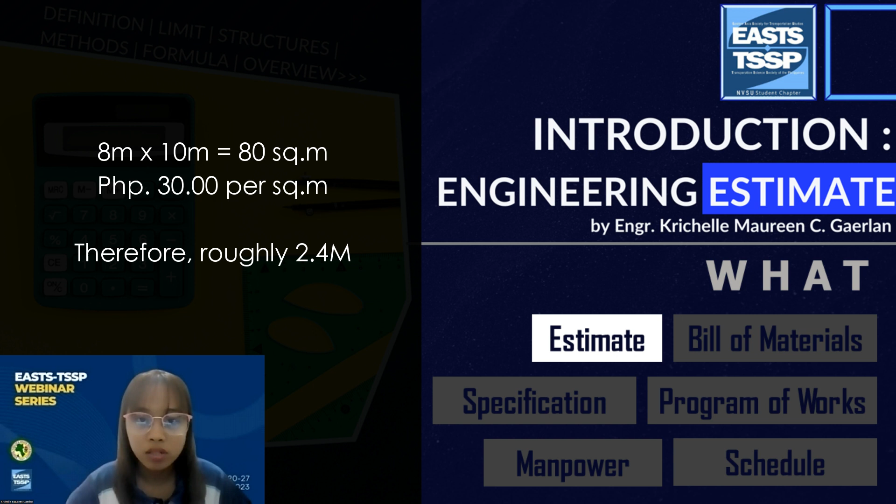But for some cases, if we try detailed estimate, the cost might experience decrease, but it takes time to compute because you go into details as per proposed plans of the building. However, detailed estimate gives us more accurate, near-reality projected costing.

In rough estimate, we just give the rough idea of cost of structure from previous experience and knowledge and neighborhood structures. On the other hand, in detailed estimate, we give the details, specifications, and quantity of each and every material.

Speaking of cost, I hope you won't interchange it with the definition of price. The key difference between cost and price is the amount of expenditure you incurred on materials, labor, and other related activities. In contrast, price refers to the amount that the supplier charges for providing you the goods and services. However, price and cost both have the same meaning, the amount of money you pay for something, or that something that costs. But the main difference again is the perspective.

Price is generally used to refer to the amount of money that a supplier or seller is asking for something. And cost generally refers to the amount of money that you will spend, rather than the price of the product or material needed.

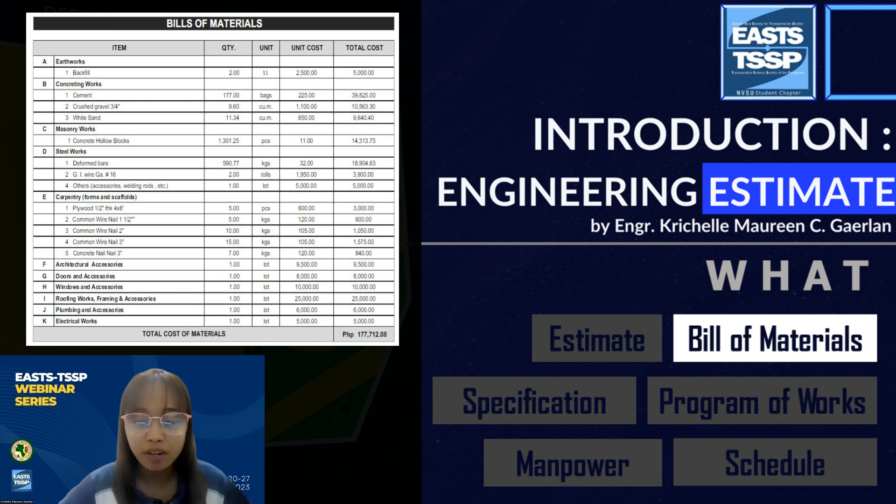Bill of materials, or BOM, is a structured list identifying all materials, components, and subcomponents required to construct an activity, as well as procuring and using the material.

Specification, or what we call the spec, as per Autodesk definition, means the detail of work and workmanship required for each construction project. It is usually a written document describing the scope of work, any materials that are to be used, methods of installation, and the quality of workmanship under contract.

Program of works, sometimes equivalent to the bill of quantities, represents the project information, the basic information like the title, location, the projected budget, allotted budget, the duration, how many calendar days, including the list of summarized quantity of activities, as per material and manpower.

Manpower, speaking, is the working force that is committed to building constructions, such as planning, erecting, and modeling the building. Say, the engineer in charge, the foreman, laborers, plumbers, electrician, mason, carpenter. These are the key role players in manpower.

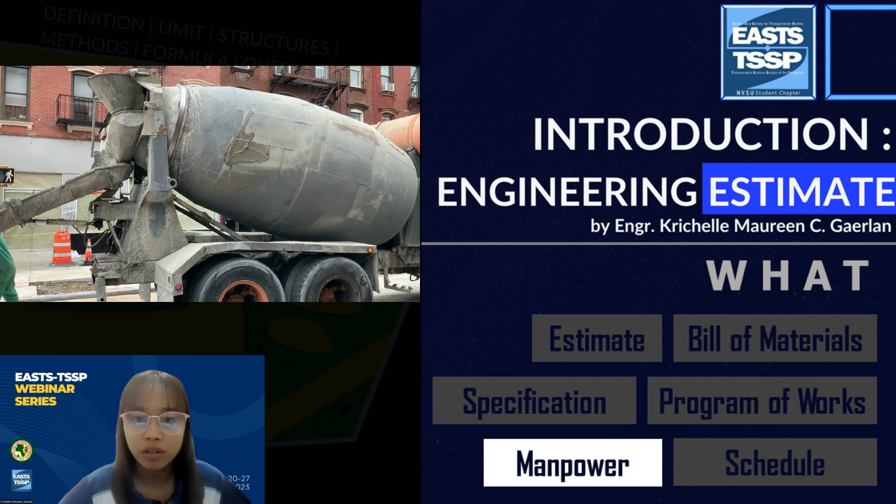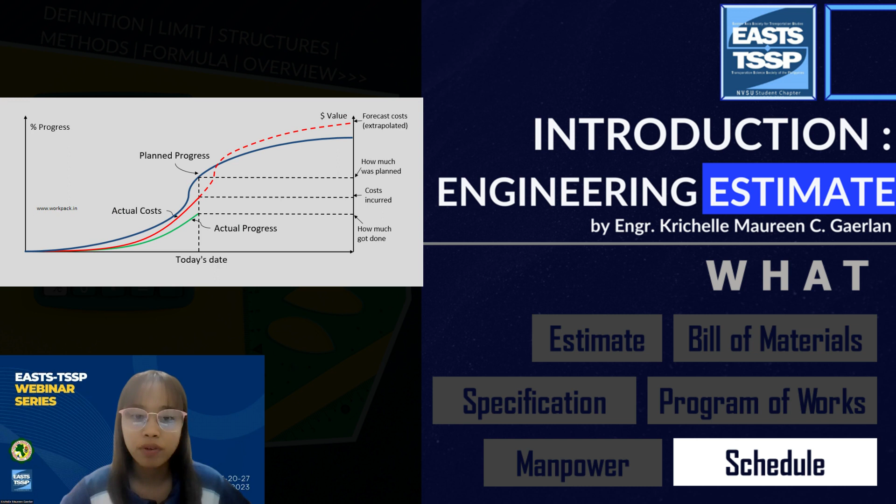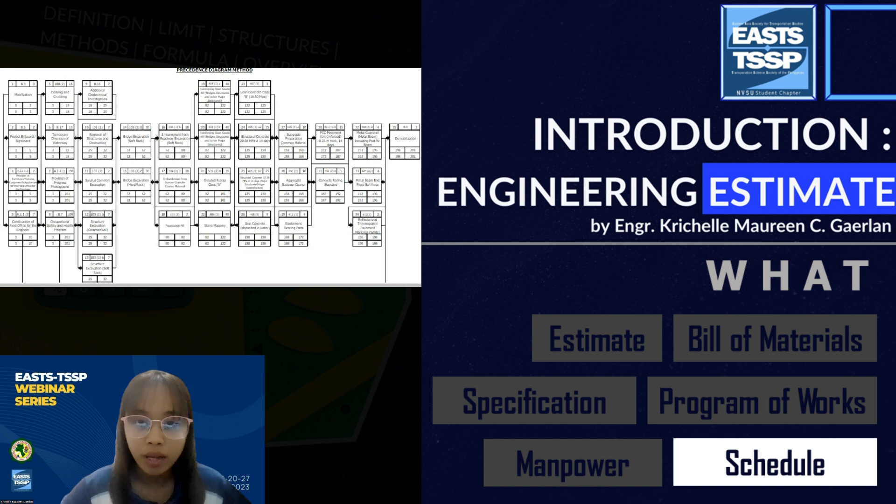Schedule is a timeline for every task and event in a construction project. It is a tool used by contractors to track the progress of a project. For some instances, we also include the bar chart, S-curve, and even the CPM or critical path method to look out for priority projects. However, in modern techniques nowadays, we use the PDM or precedence diagram method, which is more informative and easy to evaluate.

In the estimating profession, we also have three categories who does the job. As you apply for work, especially abroad, you might encounter job titles like cost engineer and quantity surveyor. Cost engineer originated from the United States, and the term quantity surveyor came from the UK. Civil engineers tend to have the ability to estimate, thus making them play the role of being a cost engineer and sometimes value engineer.

But when it comes to the title quantity surveyor, to become certified for the title, or if you want to work abroad for it, it takes years of experience. The least experience would be like 3 years, and you have to earn a bachelor's degree in quantity surveying and pass rounds of examinations plus an interview to get certified.

Certified quantity surveyors refer to a person who is a holder of a certificate of registration and a valid professional license issued by the Board of Quantity Surveying and the Professional Regulation Commission, who is legally qualified to practice quantity surveying in the Philippines. Anyway, it is your option.

If you want to enroll for schooling, it's like a masteral degree, 2 years as far as I know. It is offered at MAPUA, PIBE or the Philippine Institute of Built Environment, PICQS or the Philippine Institute of Certified Quantity Surveyors, and sometimes at PCA or the Philippine Constructors Association. It's like an equivalent group of professionals for civil engineers, but more focused on quantity surveying or the broader estimate field.

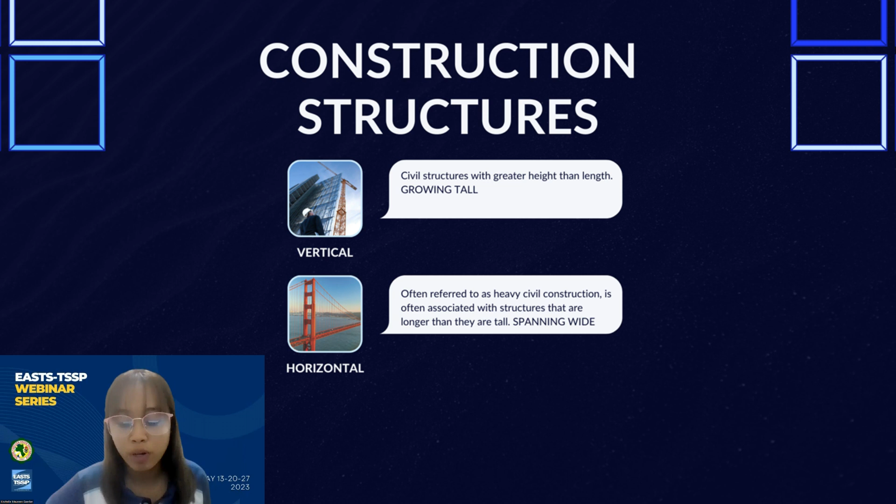So we have the vertical structure and the horizontal. To establish which category your project falls to with its spatial reference, or the space: horizontal construction is typically wider and lower to the ground, while vertical construction is higher.

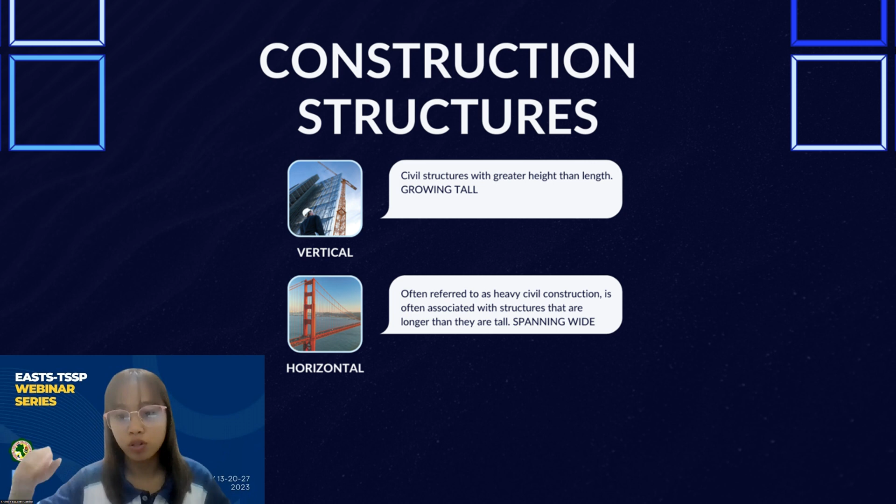Vertical structures are structures that are growing tall. A skyscraper is an example of vertical structure, and so is a high-rise building. Typically, a high-rise building is considered to be more than 7 to 10 stories, or 23 to 30 meters.

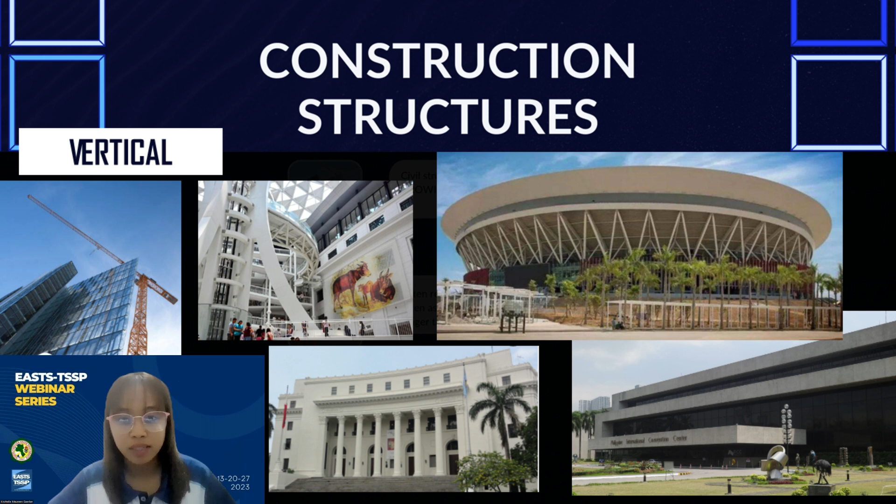Vertical construction primarily consists of projects that are built vertically and rely heavily on design by an architect, but we also do that as civil engineers, though there are limits. Examples of vertical construction projects include buildings like skyscrapers, offices, apartment buildings, museums, parking areas, subsurface or structured facilities, and building foundations and site works.

Horizontal construction involves structures that are longer and wider than they are tall. Some examples of heavy civil construction projects include, but are not limited to, infrastructure and transit such as roads, railways, and bridges. We also have power and communications like transmission facilities, electric lines, fiber optics, and subterranean pipelines, sewer, and water lines.

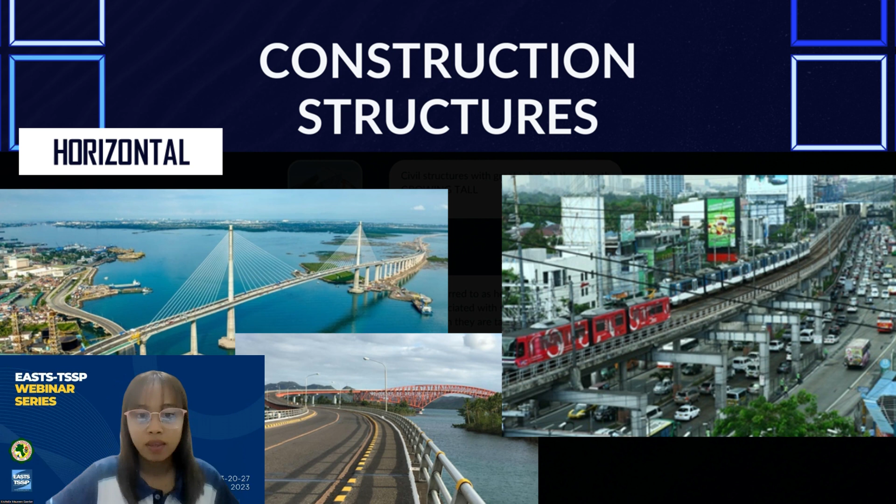Moving on, there are several applications that you can use on your estimate, especially when you are on a certain foreign company. Some require using Cost X or Plan Swift, contractor foreman software, on-screen takeoff software. But what's more prevalent is using Primavera, MS Project, or your customized spreadsheet template using Microsoft Office Excel.

What makes MS Excel convenient to use is that you can create your own template. You can use it on your private projects, and you can update factors, automate the links and formulas, add infinite worksheets, and insert your own charts and diagram schedules. It is more handy, and there is total freedom because you are the creator of your own template.

Unlike Primavera, MS Project, and other applications, there are limits and it urges you to encode manually the data so that you can compute the project cost, manpower, equipment, and projected calendar days.

Now for the formula, we have the basic computations such as area and volume. Usually the unit for area is square meters and volume is cubic meters. We apply area computation usually on ceiling works, carpentry, cabinets, drywall partitions, glass works, formworks, roofing, painting, and masonry works, especially tile.

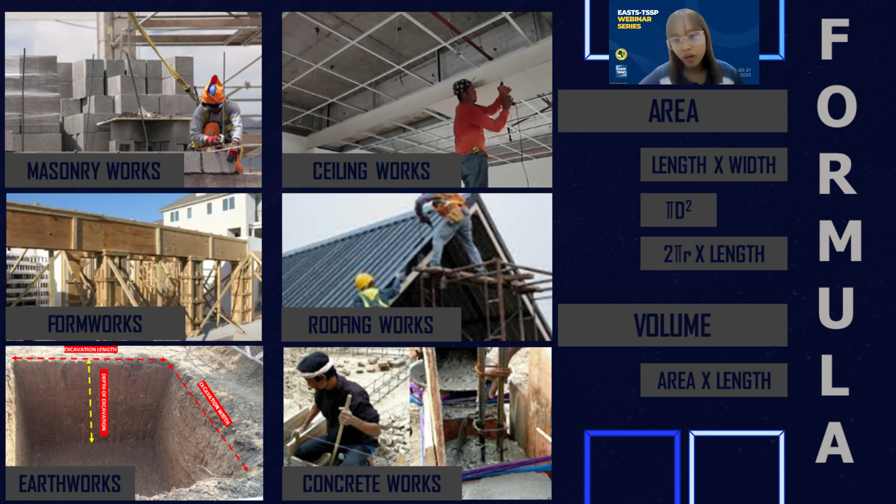For plumbing works, we get the sum of all linear length of needed pipes, either sanitary or water line. And we manually analyze and count the required fittings like T, elbow, coupling, or Y, and the plumbing fixtures like the water closet, bidet, urinal, sink, lavatory, and shower.

As for the components, one must know the parts of what kind of structure you are estimating. A component is a constituent part of a building. Say, for example, the basic components of a building structure are the foundation, floors, walls, beams, columns, roof, and stair.

These elements serve the purpose of supporting, enclosing, and protecting the building structures, and these are essentially needed to reflect on your estimate. Why you should be familiar with the components is that this is to avoid redundancy or missing quantity in your computation.

If you are not familiar with what you are estimating, you can expect errors, maybe an inadequate number of pieces of rebar or bags of Portland cement. These small errors might give you unwanted risk and affect productivity during actual implementation. Instead of gaining, you might be sacrificing time and money. So you need to explore the parts of the structure and know how to organize them.

Shown here are the basic components of a building. The parts below usually consist of the foundation, grade beam or tie beam, then ground floor slab. Succeeding floors above, we visibly see the columns ascending, the reinforced concrete beams, suspended slab, masonry works, especially the concrete hollow blocks, walls, and tiles for cladding stones. We also have the roofing at the top, the doors and windows, accessories, plumbing, electrical, and then fully furnished with painting.

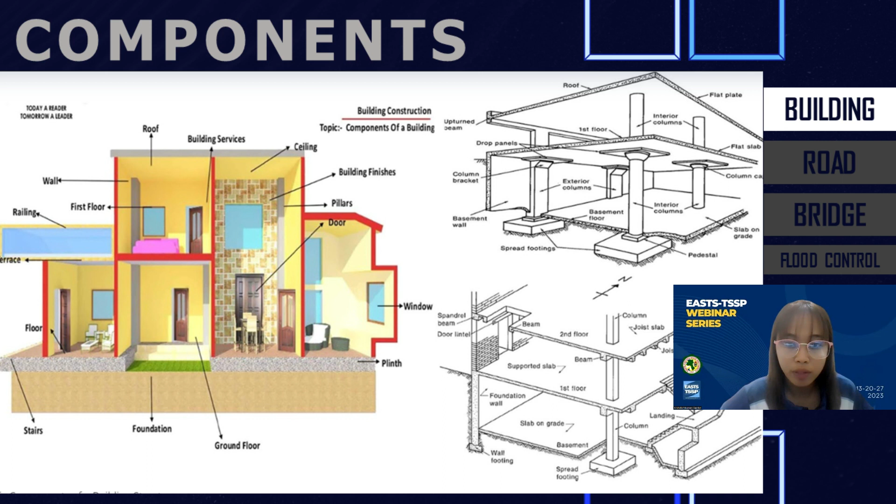Note here, in construction of buildings, we first include earthworks, especially structure excavation, and also establishment of bunkhouse, project board or billboard, or information board consisting of building permit, meaning you are allowed to operate. And as much as possible, we put a protective or temporary fence for safety purposes.

For the roads, we have the basic subgrade, subbase, the base, and the topping. The topping could be made of asphalt or concrete. Road designs vary as per the road engineer's design, as per plan, and their basis is more on the DPWH Blue Book.

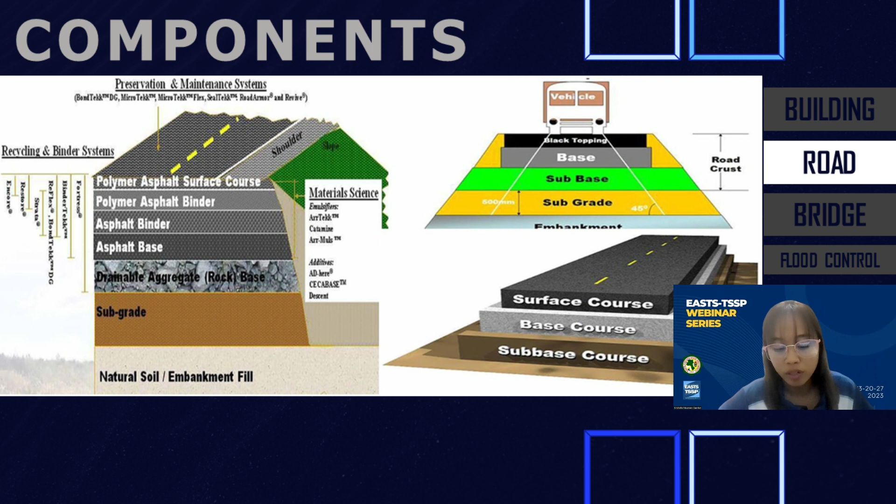Bridge construction comes in different kinds of structure, but basically we have the abutment, foundation, girders, pier, parapet, and slab deck. Actually, bridges have two parts. The substructure components span below from the slab soffit down to the foundation, while the superstructure part is from the slab ascending to the frames above, or what we call the link wires or rods.

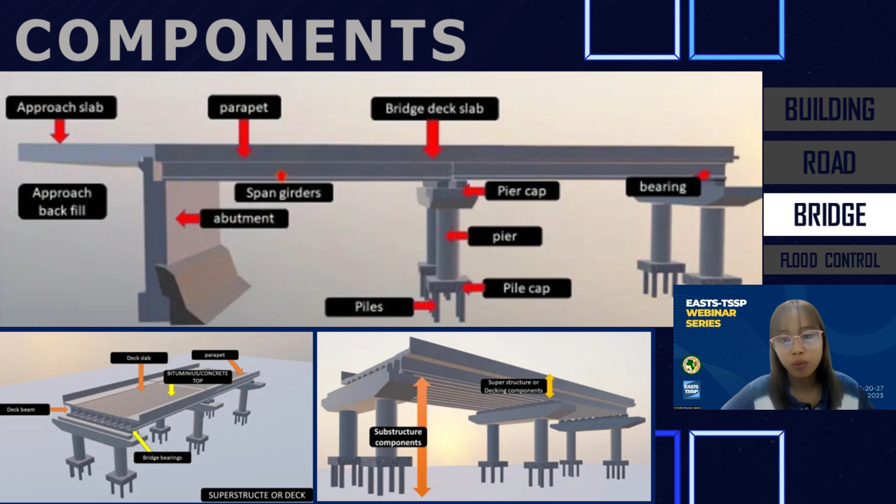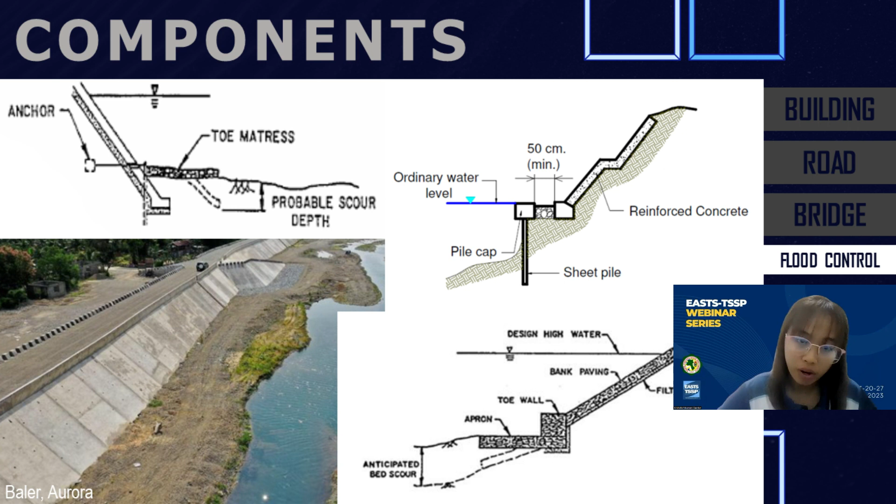As for flood control, shown here is the reinforced wall with basic parts: pile cap with sheet pile, then sloping above is the reinforced wall. Other kinds of flood control include mattress, bastions or riprap, stone masonry, and rubble masonry.

Now, say you are already familiar with the components. Here are some tips before we end this short introductory estimate. One of the most important things is that you should know how to read plans, know the specifications and even the details. Next, try to imagine how you're going to execute the activities. List the materials and possible manpower needed, and be aware of the sequence of work to be done.

In estimating, be familiar also with the multiplying factors, like if you are computing for the number of CHB walls, you compute for the area multiplied by the magic number 12. Then you can get the number of CHB pieces to be ordered. Aside from calculating the required number, be aware of the market availability and the price too.

Organize and be able to create your own format in the event your company does not have their own estimating software. You can use MS Office, but you should know how to input data and manipulate quantity takeoff. Know how to categorize which item would fall where—like, for example, we have reinforced concrete isolated footing, column, beam, slab, and RC wall footing.